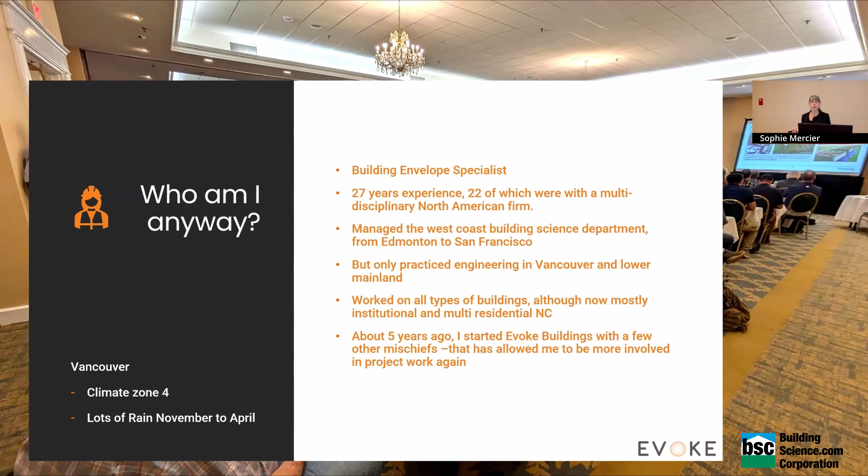So I mentioned Mark, one of my mentors. Another guy that was in the office for the 22 years that I was there was Pierre Gallant. He was more on the office side. He knew what he was doing, of course, but he was kind of like the guy with all the sayings. There's a lot of stuff that he said that have stuck with me, and there's a bit of mix between those two here.

Some of them, of course, don't have all to do with building science. The first one is: hire for attitude, you can teach the rest. I'm the living proof that Pierre was living by this saying, because he hired me - I didn't know squat, and I had a lot of attitude.

The second is: you can make a mistake, but don't make it again. Who doesn't learn from their mistake? That's what you remember - you get burned, and you will go to great extent not to have it repeat itself. I would add to that: you can make a mistake, but don't make it again, and if you make that mistake, make it small. Don't do it on a super large building where there's thousands of the same detail, right? So test on small stuff.

But coming back to the cavity, it's not something that is new, right? It's been written into articles a long time ago. Long time ago, 1963, this publication, and there were others around the same period that talked about that.

This is an extract. They're not very long either, right? They're like 8 pages, very easily read, and you can digest them very easily. That's just what I thought was a good summary of it: as with capillary suction and gravity, water entry resulting from an air pressure differential can be controlled by the introduction of an airspace in the joint or wall, right? What a simple approach to designing one.

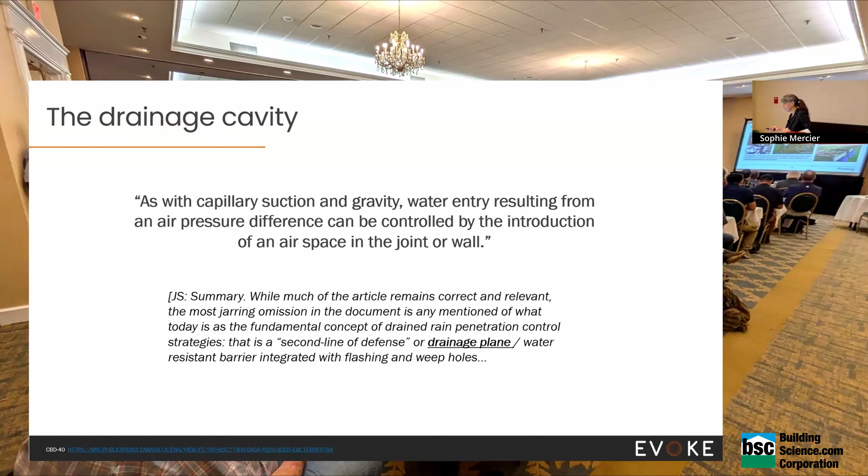So after the publication of the CBD, we had the adoption of the cavity in Canada. Some people did read it, but eventually people forgot. In the 80s and the beginning of the 90s, it disappeared almost completely in Vancouver.

As a young engineer fixing leaky condos with face seal cladding, I was quite impressed one day when I had to do an investigation of a building that was built in the early 70s. It was not because it was leaking, it was because it had those little square tiles. It was a high-rise, and the tiles were falling off, and we wanted to know how it was built so that we could design something to replace them instead of just trying to glue them back.

And we opened the wall, and there's a cavity behind it, in 1970. That's when I learned about the CBD, because I came back to the office and I was like, oh my God, look at this, they had it. Mark said, yeah, read that. So yeah, there were cavities in facades before that, but then people forgot. And that brought on a big mess.

The leaky condo crisis, I mentioned it a couple of times. It culminated into a commission of inquiry that looked into the quality of construction in BC that got published in '98. At the same time, the codes were changing to try to adapt, and the building envelope professional became a thing.

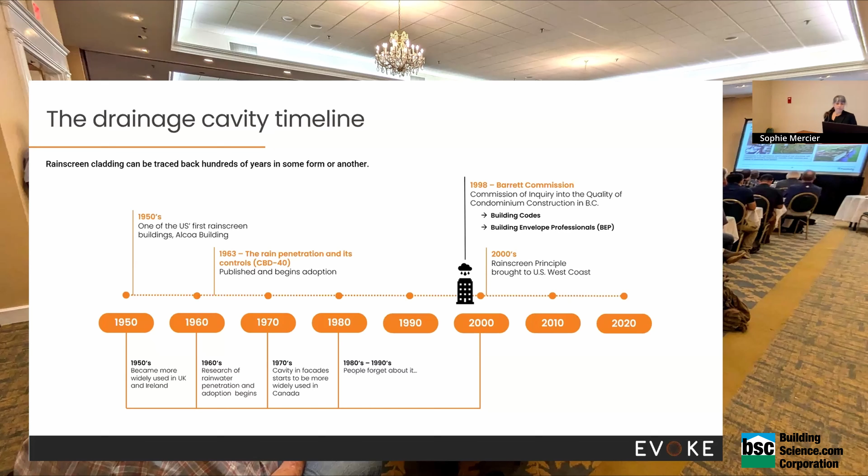So how big was the problem that we faced? Again, I don't have a lot of data from that time, but Dave Ricketts did a really nice presentation at BCBEC, and I stole the numbers from him. In BC alone, $4 billion worth of repair because of leaks. And that affected more than 30,000 units. That's a lot.

Some of the things that came out of that—I mean, how long did it take to repair all that? I think that there are some buildings that are still not repaired today. Some people have been putting their head in the sand for years, and some are being fixed by court order. Like when the owners cannot agree to repair their building and get a vote that can pass a resolution to do it, the courts eventually step in because buildings are shored up and the structural components are getting to nothing.

That reminds me of another story. You go to a site to repair some of those things. Have you guys heard of structural stucco? Like structural paint, about the same, I would say. But the first time I was looking at things, they're starting to take the stuff off on the ground floor, and I'm on the second floor, and I go to look at something on the balcony. The guy's like, you should step back.

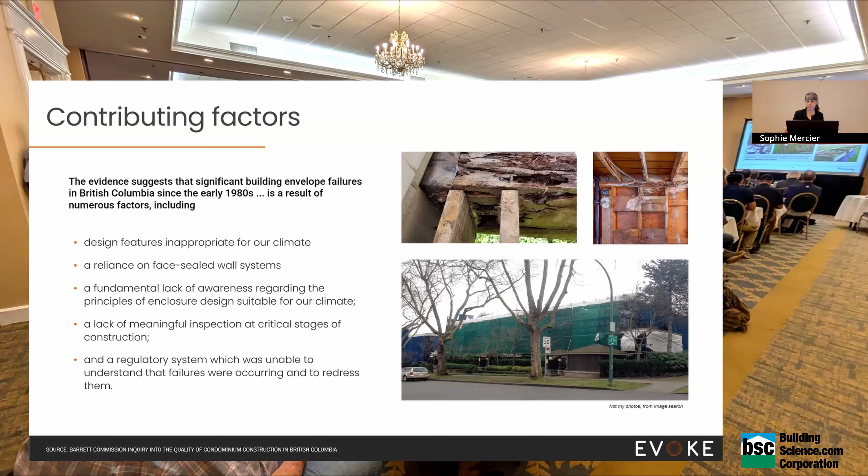So that was kind of my first point. I'm not just going to talk about the drainage cavity, but I want to round that up with - is history repeating itself? Because what I'm experiencing at my end in Vancouver right now is that, up till now, perhaps we're going to have some breathing room finally, but not for a good reason - there's been a boom in construction. Everybody's like, we need to build more, we need to build more. We don't have all the trades equipped with building things the way we want them to be built.

In fact, I've been going to site for over 25 years, and I'm always so surprised that a trade doesn't understand how to do a subsill flashing, or how to deal with a saddle properly. And I think that more than ever - I don't know if it's movement of people between companies, especially on the trade side, but also within our industry - mentorship is not the same as it used to be. I had the privilege of working with one great person for 22 years. Not a lot of people have that opportunity anymore when they move and move and move. You don't create that kind of condition.

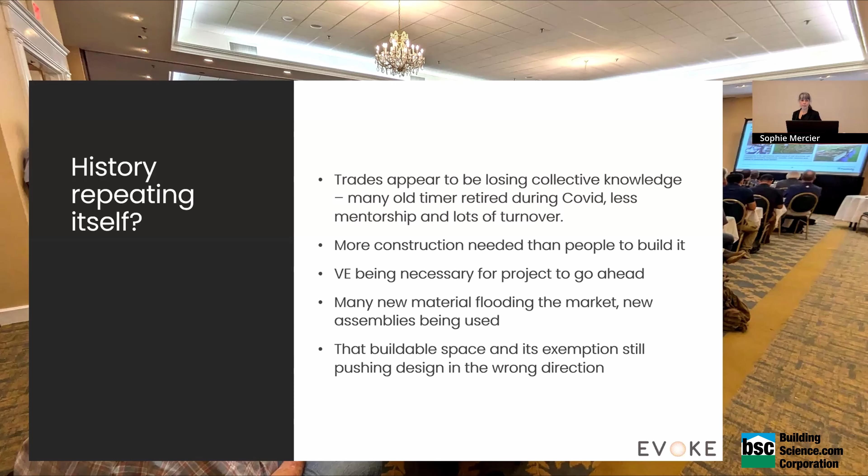The second one I wanted to talk about is better insulation. This one, not so much because of a failure, but more in terms of its evolution and how we can build on what we've done before. Just an example of it.

For a long time, buildings were built out of stone, with no insulation whatsoever. Eventually, the frame building came into play, and there was that nice cavity. So by convenience, I guess, and for more comfort, people started putting things in it, like newspaper and whatever you had on hand. Eventually, the insulation, because of the oil crisis in particular, picked up in terms of developing better materials suitable for what we need them for, more resistant to moisture, with a better R value, of course.

But again, I think that we're working on materials all the time, but there was a bit more stagnation that happened in the 80s and 90s. There's something repeating here. 80s and 90s, what were people doing there? The energy cost nothing in the 90s, right? So there was no huge incentive to work on it, I guess.

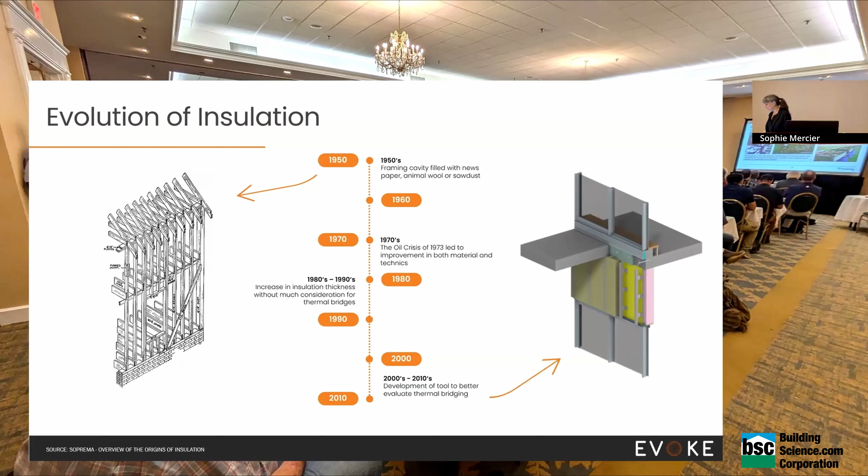So up until more recently, we're starting to take care of insulation, not just by itself, but in the context of an assembly, where we look at its efficiency within the context of the building. I'm working with one of our partners, Patrick Roppel, and he's kind of the guy behind this. The story I'm going to tell demonstrates that you can build on what you've done and get to good places.

We were all at MH, at Morrison Hershfield, and we were working on the Olympic Village. There were quite a few projects being built around the village because of the Olympics, so they were all serving to house the athletes. Part of the goals of that development was to be LEED Platinum. By trying to stretch the goal a little further, for a number of projects, and having a lot of the firms that wanted to do the right thing at the table, there was a lot of discussion as to how we were going to achieve that in terms of making the building thermally adequate to meet those targets.

At the time, there were very few exterior insulated buildings in Vancouver. At that point, I think we were a city of window wall, 70% window, floor to ceiling with spandrel. So there was not a lot of data out there to help with the program. What was happening is that we realized very quickly we needed to put insulation outside. We needed to have framed wall with lots of insulation. We could not do those things in window wall. But calculating what was happening, especially with the outside, there was not a lot of data out there.

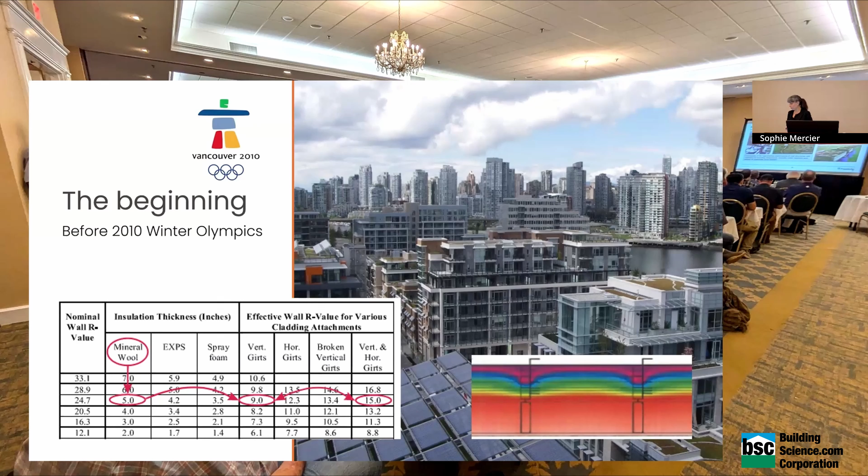On the footsteps of that, the team at MH wrote a paper, and it helped consolidate. When you write a paper, you think about things a little bit more, right? With perspective somewhat. And it came to a point where there was work there that we needed to push forward. And the first project was done trying to develop a bit more around the methodology on how to do the 3D calculation.

When you talk about non-combustible buildings, it's all very conductive material. So it's a little bit harder to imagine how the heat flows are going, and a little bit harder to evaluate properly if you have things that happen in 3D, more metal here than there, intermittent clips, for example. So ASHRAE 1365 was the first project that looked at validating the procedure to get there.

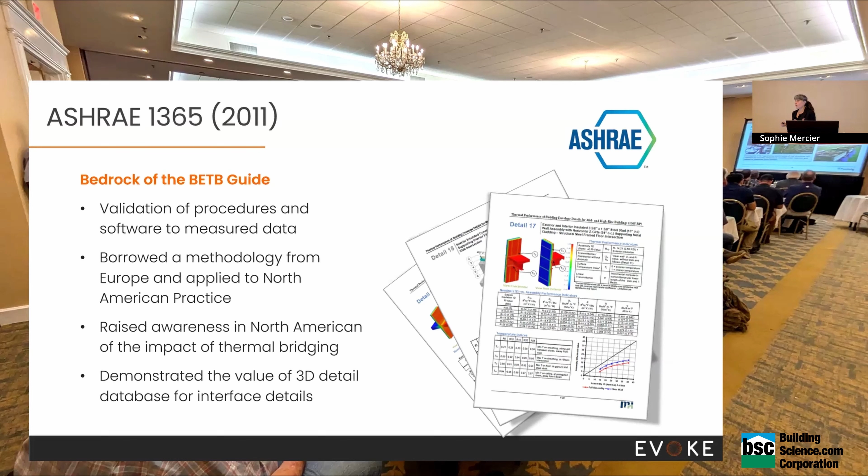And of course, we didn't invent it, we borrowed it. We looked at Europe and what methodology they were using there. And in the process of that, our goal was to help raise the awareness of the impact of thermal bridging, right? Starting to understand better what those impacts were. It was, I think, quite successful, and out of it, there was a lot of discussion to try to produce something more appropriate for practitioners to use, to take on that methodology and apply it across the board.

And that required a lot of funding. Gathering funding is a lot of going to people and convincing them it's the right thing to do and all that kind of stuff. So it took some time. In between, what Patrick ended up doing, while helping search for funding to do the next step, was to produce those solutions where he broke down some of the most asked questions.

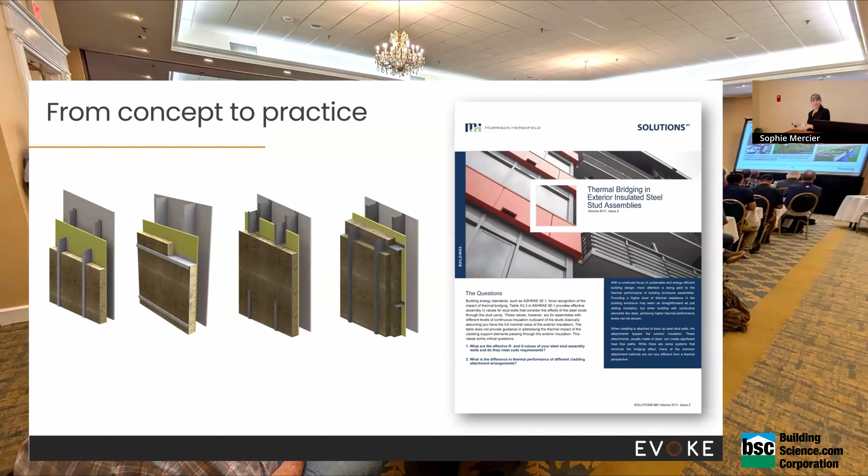The clip one was one of them: what's the difference between Z-girts on the outside that go through the insulation? What if you do them crossed instead? What happens if you put them intermittent, right? So that was the first one. The other one, I didn't have a copy of it, unfortunately, was the spandrel section in curtain wall. What is it worth, truly, in 3D, and how does it scale with the size and so on. So those were two that were quite successful and helped launch into the thermal bridging guide.

So that was the tool that we needed to help everybody get on board with that new methodology for the area. First, it established exactly how you should be looking at thermal performance of an envelope, looking at the fact that you can take, like they do in Passive House, the area of the components you're trying to evaluate, like the wall, for example.

You take the clear field value, you multiply by the area, you add the linear transmittances multiplied by their length, and the point transmittances multiplied by their number. And you divide everything by the area. It's a very simple calculation if you have all those numbers. So the thermal bridging guide was a first pass, anyway, at getting numbers out there.

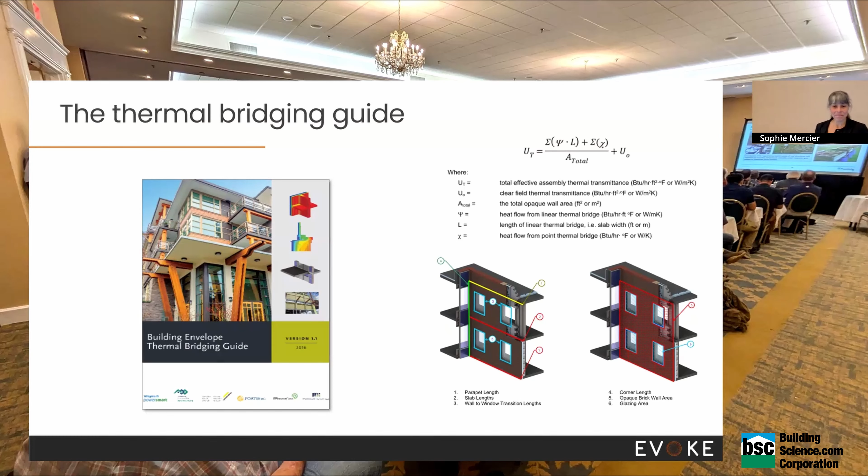So not only did it describe how you needed to do the methodology, but it modeled a number of details and assemblies, and put that as an appendix to the technical part of the guide and put it out there. The first edition, 600 pages. Most of them, details. So you see why the funding was important. I guess I explained that a little bit, but what I wanted to say about this is that as we went on and did those things, it became part of code.

The guide was so well received that it actually influenced code in the region. And we're lucky in a way because the way the code works in Canada, you have the National Building Code, and then the provinces can either adopt it or modify it slightly. In BC, they modify it slightly. But more than that, the city of Vancouver has its own code.

So I think what was very helpful in this process is that there was a large group of people in Vancouver that wanted to do the right thing, including at the city. And at a small scale, it was easier to affect changes. And when the province saw that it was working very well, they looked at the ramification for other zones, but they extended it and adopted it at the provincial level, instead of waiting three code cycles at the national level to trickle back down. So that was one good thing that came out of how it was structured. There's a whole slew of bad things when everybody can do their own thing, but that one was a good thing.

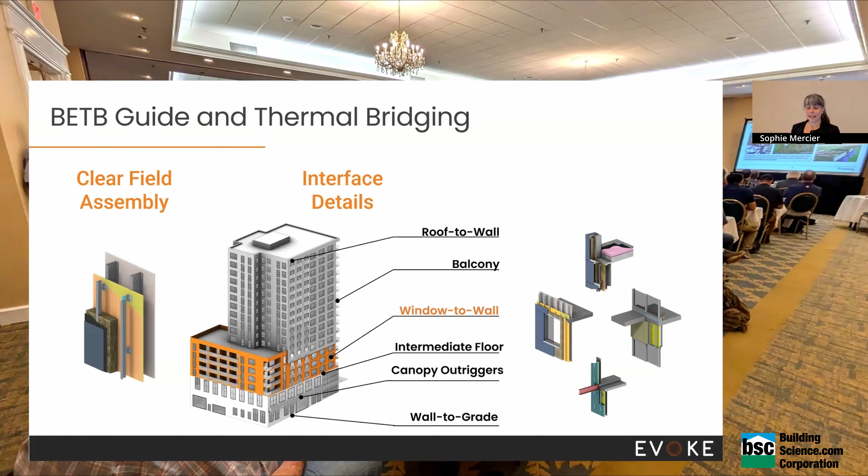Anyhow, so we do those projects now and we use that all the time. The thermal bridging guide is the basis of how we do calculations to give input to energy modelers that will provide what the building performance is. And what's become evident in doing many of those is that the details contribute 30 to 70%. A good building will have about 30% heat loss through the details. And a building where you didn't pay attention whatsoever could have upwards of 70.

And why do we have 30? Again, that is non-combustible construction, so steel studs, a lot more conductive than wood. You cannot do without windows, so you'll always have some window perimeter, wall to roof transition, base of wall. You will have architectural features regardless of what you do. Another thing that became evident is that the window perimeter was often the largest contributor to the heat loss. So from my experience, if I give you two things on a non-combustible building: pay attention to your windows and pay attention to the details. It's not just about the wall selection you make.

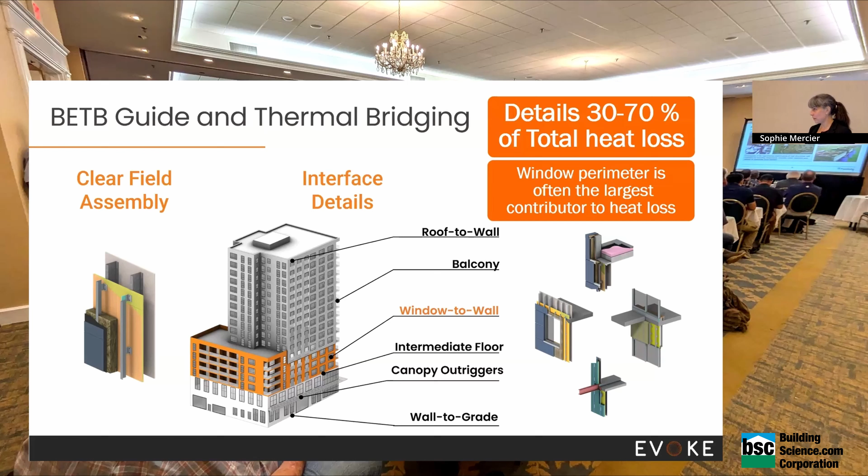So I said it was 600 pages, right? That was in 2015. Then it was successful, and people were like, but what about this detail? What about that detail? So there was more funding. We did more details. Version 2, 3, 4, I don't know how many pages it is now. In fact, it's a bit obsolete, because with so many pages, how do you find what you need? So the next project that was funded was to develop an online tool that stored all that, on thermalenvelope.ca. The database of all the details done to date with the methodology established for the thermal bridging guides is on that website.

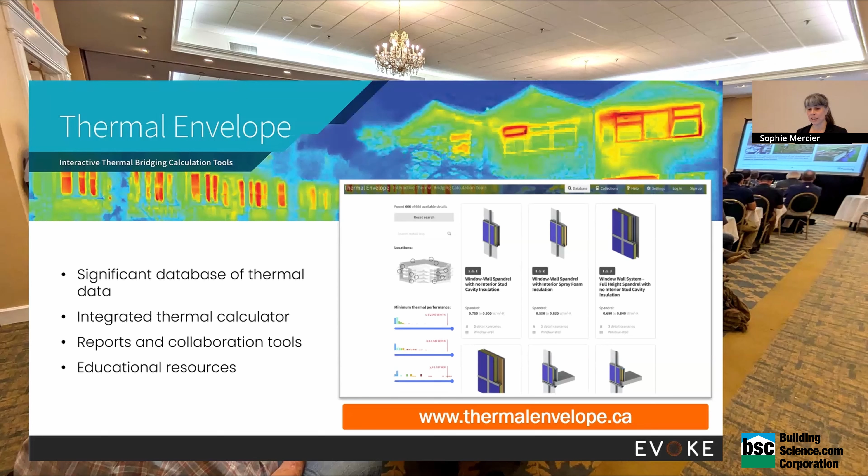And they can be searched by type. Also, if you're targeting a certain performance, you can target that performance and it would give you details that could achieve that. So great resource. And there's other tools on there and training as well. So I invite you to go and have a look.

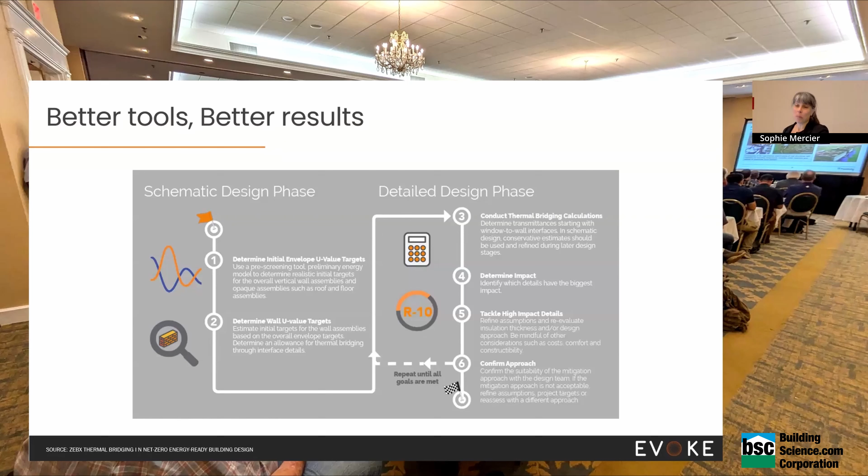To somewhat wrap up that story, I think one of the lessons is that with better tools, better results. With better results, better tools. It's a circle that goes to make things better, building on what you've done before, getting to a good place, but we're not done yet. There's tons more to do. The funny story is that when Patrick started and did the first research project and the thermal bridging guide was finally issued, he said, whew, I don't plan on making that my career. He's still doing it today. So it's important work, and there's still a lot to be done.

Another thing I wanted to talk about is charting the path ahead. As part of the changes in how we were doing things with energy and buildings, the city of Vancouver, but also the province, had their goals to 2030 and beyond. They looked at what they needed to do better on the carbon side, and they established that goal. At the time in Vancouver, from a builder's perspective, there was a lot of pushback on change. I think it's normal human behavior to be a little bit resistant to too much change.

And one of the ways that they tried to mitigate the pushback was to actually chart what the change would be up to 2032. So they said, listen, this is where we want to go. This is the study we've done. We won't ask you to do this from the get-go, because we might set ourselves up for failure to have an entire industry go and do the top building. So let's chart the path.

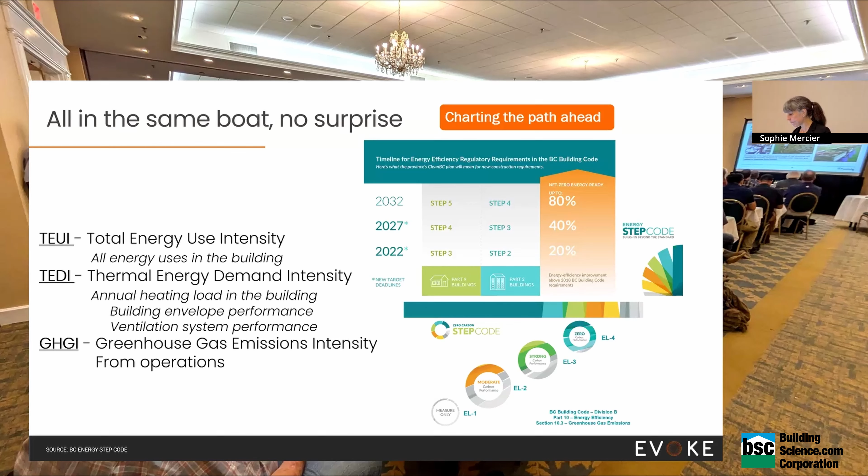but realizing that, and I should be clear, that is operational carbon, right? There's a relationship between the thermal performance of your building and the carbon you're using; both are important, and if you can balance those 2 things, maybe you're in a better place. Okay, so that leaves the question: is net zero really an achievable target for an entire industry?

I don't know. And I mean, it is a lot of buildings, right? But what I have to offer is this: net zero is a lofty goal, yes, but it's a necessary goal. Because I think that we always aim for something, and if we could get to at least a good part of it, we would be in a good place. So I think that it's an important one.

I hope that we will be able to achieve it. Perhaps not by 2032, is what I'm kind of seeing in the progress of where we're at, but at least at some point in time, soon enough. My third one, whole building airtightness.

So the history of air barriers goes back to the 70s, right? And it was probably brought on by the oil crisis again. Building professionals were looking for ways to make buildings more energy efficient. And they quickly realized that if they were able to control the air leakage, it made a significant difference. So air barriers in Canada became code in '86 and started being installed more regularly and so on.

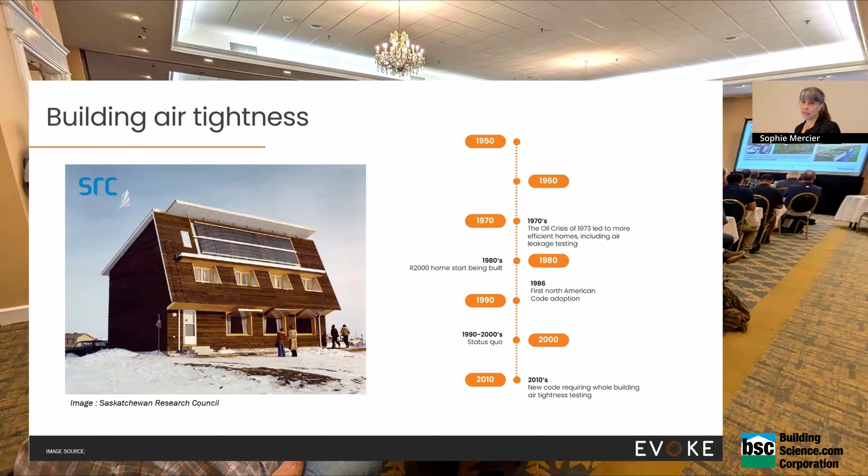And up to today, where now in Vancouver, we are actually, as part of STEP code, required to test the building at the end and report and meet a certain target. I'm gonna read a little bit here, but Canada was certainly at the forefront of the air barrier movement.

And when I was trying to find some information on that, I came across an article in the Canadian Contractor magazine, and it was an interview with Harold Orr. He was one of the lead engineers on the committee that pioneered the Saskatchewan Conservation House. And he was asked to reflect on the different stages of the development of energy efficient housing in Canada. And that's what he came up with.

Stage one was to find a way to measure where the leakage of energy happens in a house. And what was written in the article, and that was news to me, so I'll share it with you, is that at the time, there was no efficient way of testing a house for air leakage.

So the first thing that he came up with was to use tracer gases. And the equipment and everything was quite expensive, and there was no way that could be repeated on multiple houses, at scale anyway. So he then came up with a methodology that was pretty much a plywood with a fan in it and some equipment to measure what was going through. So that was in the 70s.

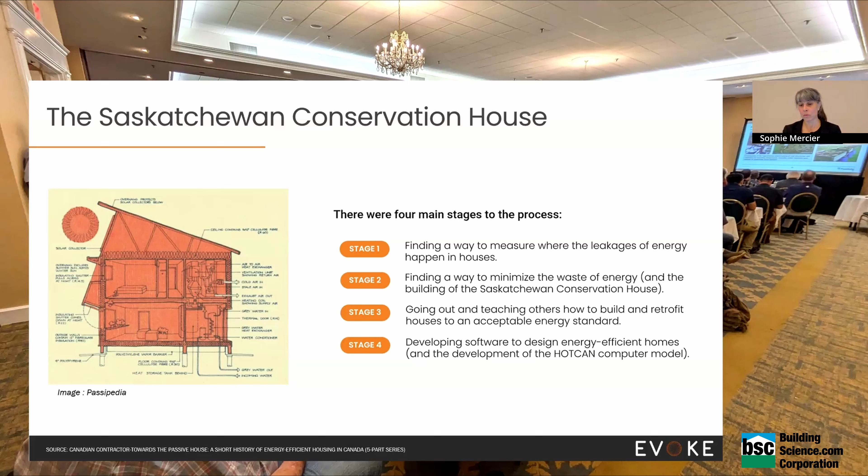What I wanted to take from those four stages is a couple of things: going out and teaching, making sure that what you were establishing was an acceptable level, and of course, having the tools to verify all this, the equipment to test and the software to evaluate where you were going to be. So how important is airtightness?

It's amazing that so many phones are not on silent.

How important is it? It can be quite important. I think that in his article, he pointed to a 50% improvement when he introduced the concept of a well-designed and well-installed air barrier. Those numbers, which I took from a much more recent publication, demonstrate that a little bit. You can see that if your baseline was at 0.4 CFM per square foot at 75 Pascal, without an air barrier, at the edge of the scale, there's like a 60% difference in the heating demand. That's kind of what we're now expecting of buildings, more or less, 0.4 CFM.

Now, does that mean we need to stop there? No, there's lots of opportunity still. But what I wanted to demonstrate here is really the scale at which the air barrier can make a difference.

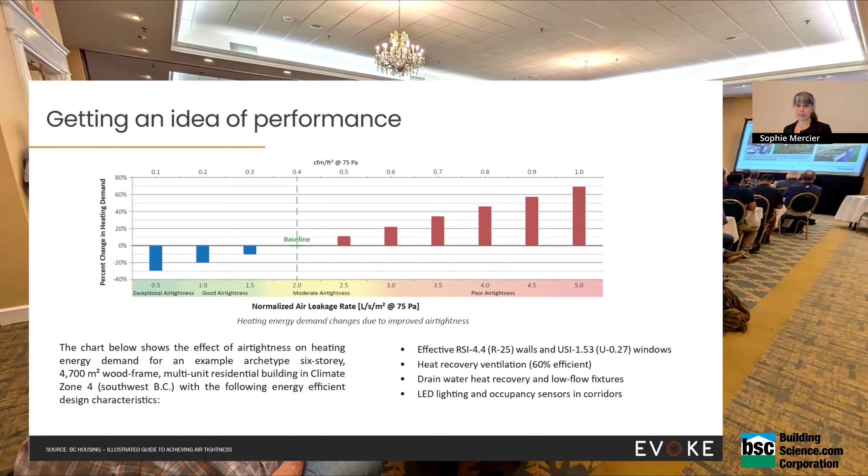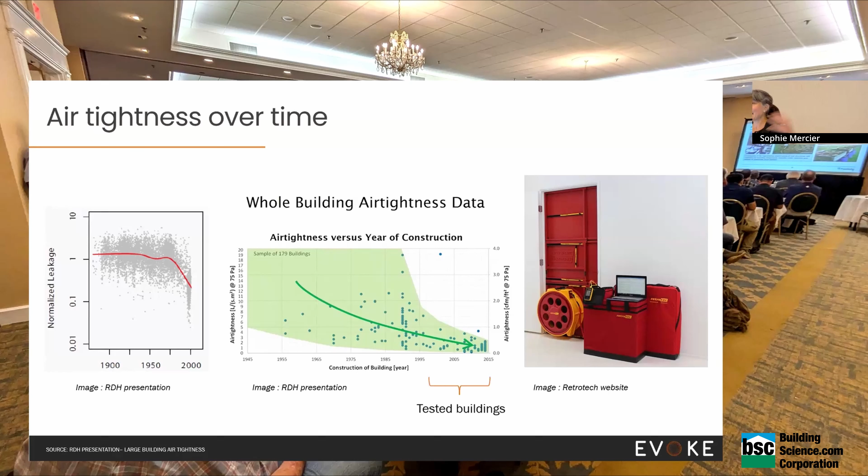That's because those data points mostly were buildings that needed to meet a certain standard and knew they would be tested. Whereas the data points of the graph before that have more to do with buildings that were voluntarily meeting a certain standard, or were tested because they were looked at in the context of a retrofit and data was accumulated. So you can see already that difference.

So that brings another question. If you're not testing, are you really getting what you're expecting? I think we've established with the leaky condo that having something in the code that tells you you need to do something is very important. We can also put energy and energy standards in there, and right now we have testing for air leakage, but I'm wondering, is the next thing that needs to be really tested through measurement and verification the actual performance of the building?

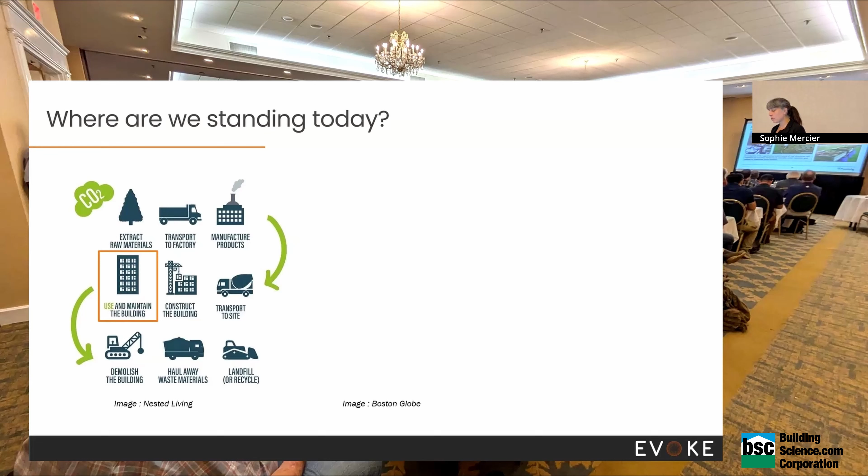But what I wanted to counterbalance with that is that the two things I think are very at play today is not only that we want to do something better for the environment, but that there's an economic crisis in terms of affordability for people. I don't know, do we want to build a world in which nobody can afford to live? Or do we want to try to achieve both? We need to keep that in mind.

So again, building envelope, not mechanical, so I'm not going to talk about that. Not embodied carbon so much as in the context of the balance of things. But again, non-combustible construction, so steel stud, where thermal bridging really matters.

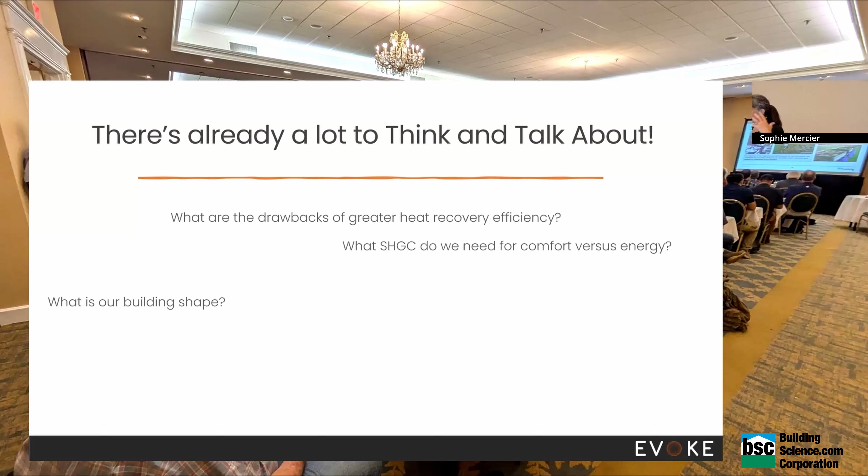So you have all this coming at you, all the changes of code and all that kind of stuff, and you want to do the right thing for the environment, and all of a sudden all the questions are coming. You're sitting in a meeting and people are asking, what is it that I need to do for this? How do I meet that? And if I do that, is that better than this? And it depends, right?

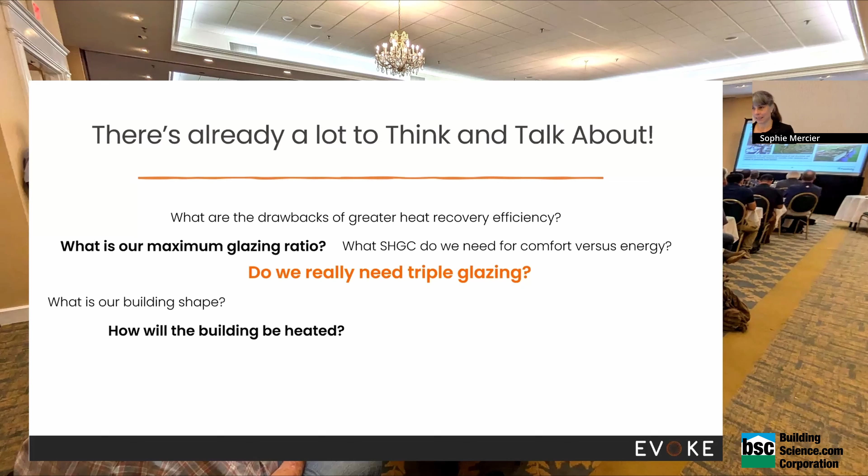At the end of the day, everybody's asking, can you just tell me what I need to do? That's what I get in most of the meetings after we discuss too much, because they don't have the background to make necessarily the decisions. When we talk about developers, the guys with the money, the people with the money developing those projects.

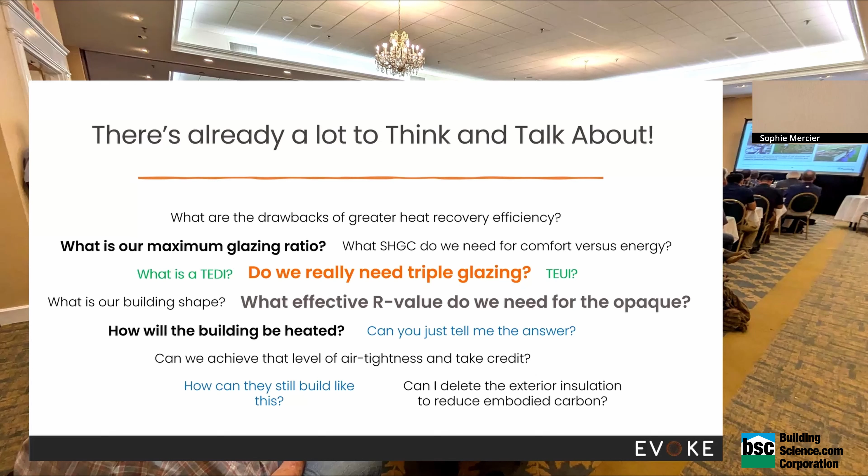So, how do we go about doing that? Even myself, I'm listening to all the presentations here this week, and there's a lot of information. Sometimes it makes my head spin, because between being paralyzed by what I'm hearing and not knowing what to do, and wanting to do the right things, where do you start?

So I thought I would try to bring it back to what I do and give you a few things that could be a good reminder for some and a good takeaway for others.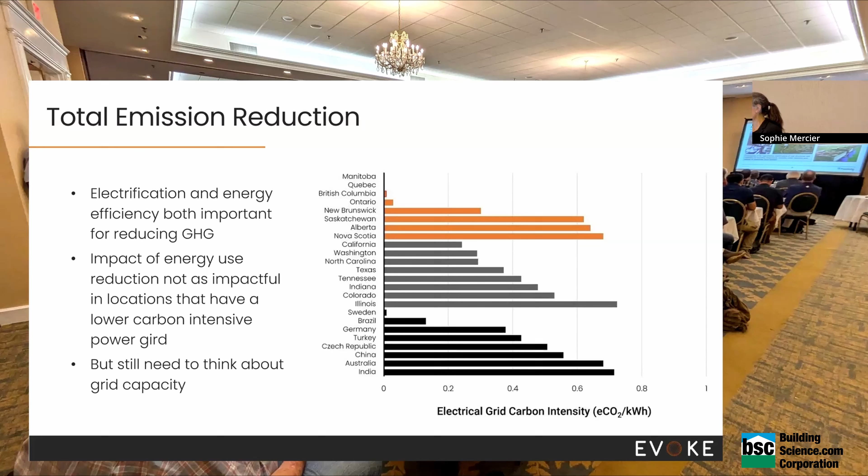I don't need to go over that, except perhaps in the context that I'm from British Columbia. You can see on this graph that the intensity of our grid is pretty low. So I'll tell you, when I'm in meetings with people who have tunnel vision about embodied carbon, I get so much pressure about taking out the insulation because it supposedly doesn't matter for emissions, you wouldn't believe it.

So just putting that in context of what I'm going to tell you next. My rule number one is the best savings is what you don't use in the first place, right?

So with an energy performance goal in mind, either dictated by code or by a sustainability goal, starting to think about beneficial decisions that would make a reduction in the amount of material you need to get to a certain thermal performance. What you have to understand is that I work in a context where, I'd say, 90% of the buildings I do are code buildings. They're not maybe 2% better than code, not 50% better than code. So the environment in which I work is trying to make the most of my sandbox, right?

So what about the perfect wall? As for the wall, think about Vancouver. We're building to the property line, we're having issues with wall thickness. So should we start really considering heavily using hybrid walls on every project?

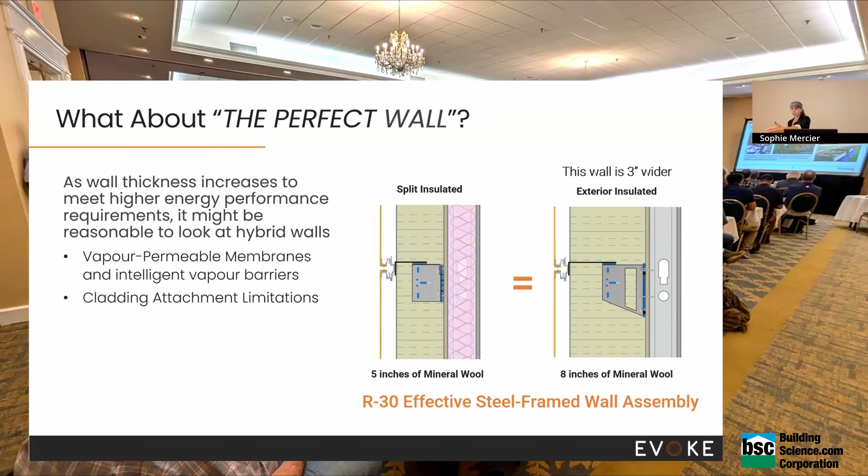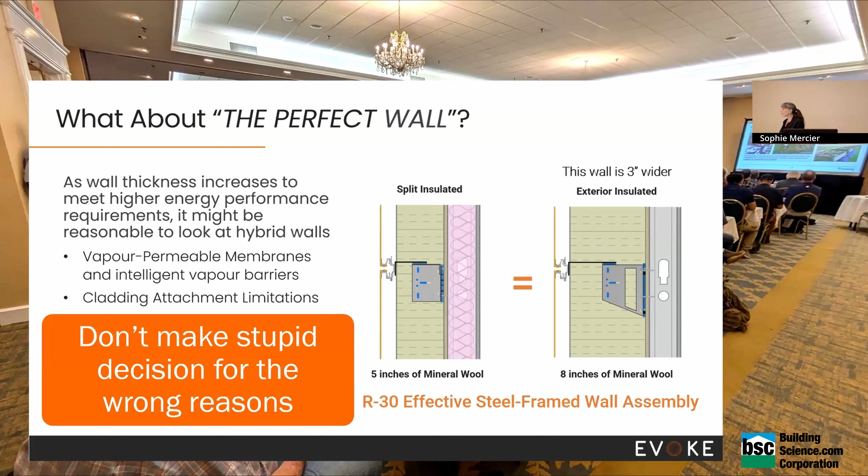Well, we have vapor permeable membrane, we have intelligent vapor barrier, and there's limitation also to cladding attachment. There's so much you can put on the outside with the wind loads and everything. So don't make stupid decisions for the wrong reason. I'm going to try to demonstrate how I approach this, trying to avoid building walls that are not suited for where they're used.

Of course, when you're talking about affecting the TEDI, the thermal energy demand intensity, you can look at affecting the air tightness. We looked at the graph, you can make a difference with that, so I've talked about that, I won't come back on it. And heat recovery, same thing, the heat recovery makes a big difference in the TEDI, the efficiency of it. So you can make a difference just by changing the efficiency of your equipment. That's pretty straightforward, so I won't touch on that more than this.

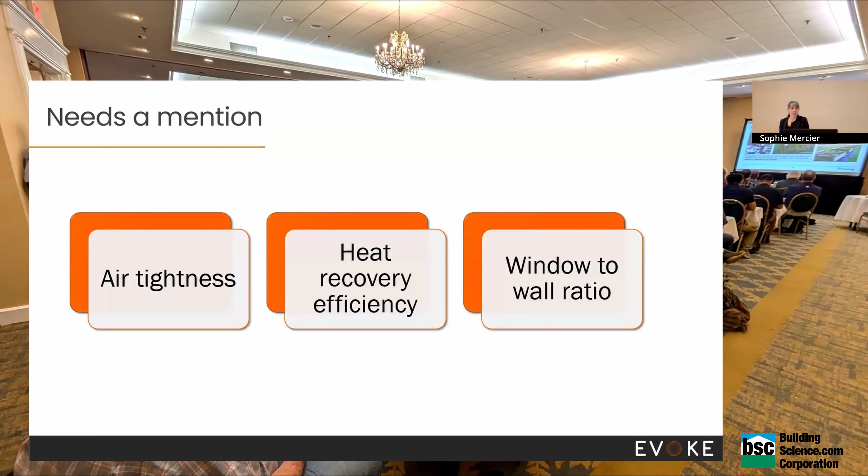And the window-to-wall ratio is also something that you need to think about. That's what you mentioned earlier, right? Form matters.

In what we do, the form matters so much that it dwarfs everything else.

What I wanted to show with that data is that if you take a building, of course in high rises, we're losing heat through the wall mostly, right? The roof is a tiny part. The walls of a tall building are a big surface area of heat loss. So this is presented by vertical surface area compared to floor area. When you have a VFAR, we call it, of about 0.5, like for a square at 600 meters, you get about a TEDI, forget the unit, I just want to talk about proportion, of 30, in kilowatt hour per meter square. If on the opposite end of the spectrum you were to do a single loaded corridor, U-shaped building because the courtyard is quite nice, then you'd be closer to 60. That's 30 TEDI difference, that's like a 50% difference just from the form.

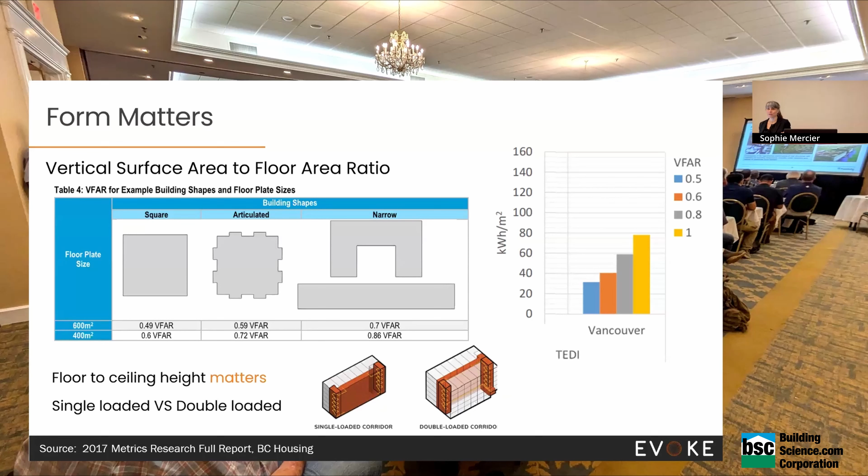Another tool that's pretty cool is Building Pathfinder. What I wanted to do is go one step further than telling you it's important. I want to show you how for the same other data, like window ratio, wall R value, roof, everything stays the same, this is the difference it makes between having a typical narrow or complex form. You can see the results. That's why it's a super cool tool, because it visualizes the results as you go.

On the other side, if you were to say, okay, I really want that courtyard, what kind of wall do I need to get there? What kind of difference do you think walls will make over the TEDI? So I chose the complex one, the middle one, not the narrow one-sided corridor. It was the one in the middle, so it was 45. And that's how much difference I'm playing between R15 and R30 overall, considering all the thermal bridging. That's how much difference I'm making with the wall. So if you want to know if form is important, and that doesn't convince you, I don't know what will.

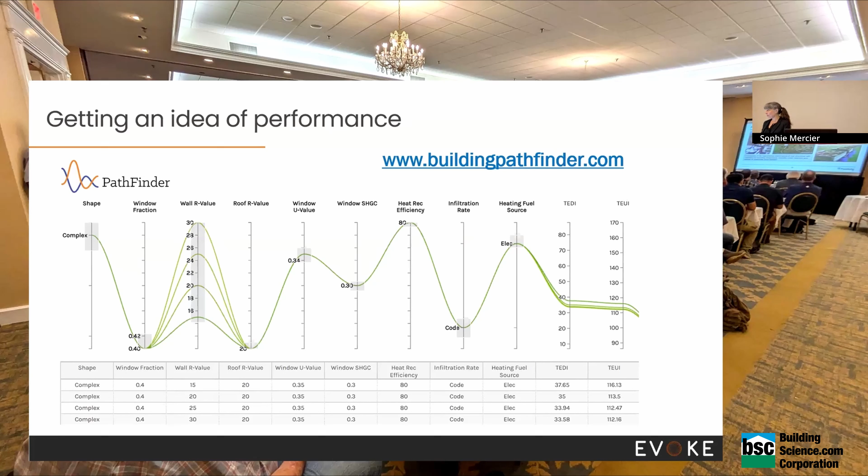So at the end of the day, not all buildings need to be iconic. Something simple can do the trick.

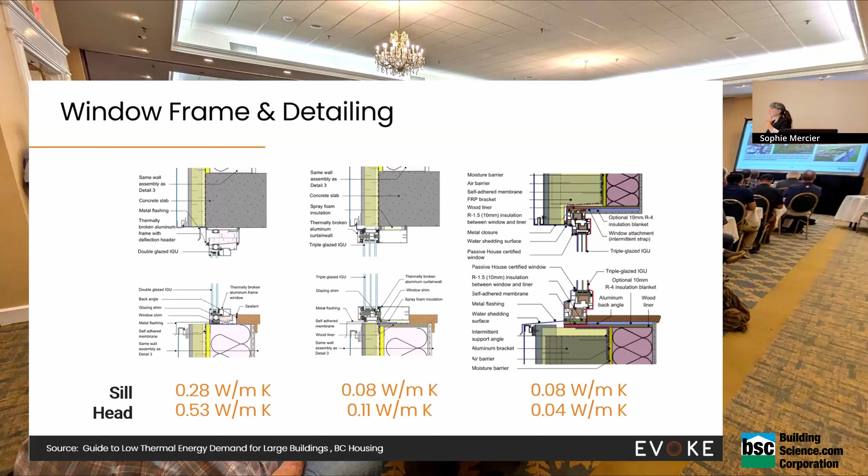On that note, I'll leave you with three things, and I'll go very fast. Because the linear transmittance is important and the length and the window, think about how you're installing your window. It makes a huge difference. That's also something you can do to reduce the amount of insulation you need to get to a spot.

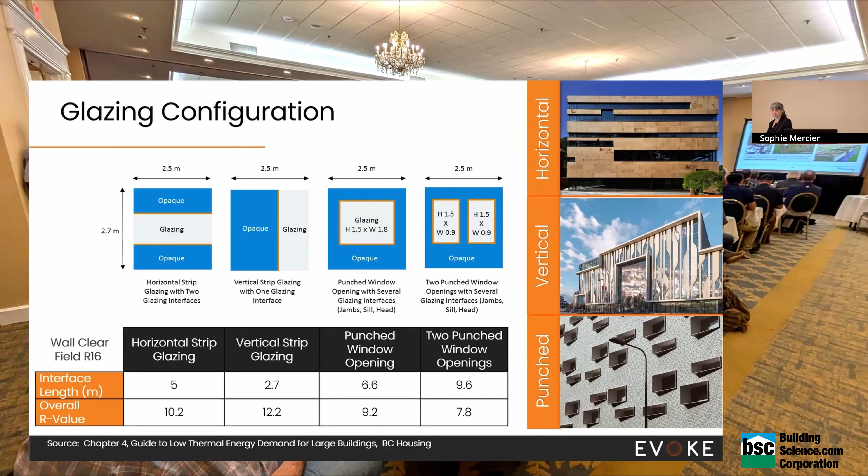The form of your window makes a difference. Like a 2-punch window versus a 1-punch window, same area, like 40% of your wall, it makes a difference. So think about that. The balcony form makes a difference, let alone that the inset balcony also changes your form. How you deal with its attachment makes a difference. The best thing is probably no balcony, but livability comes into play in high rises.

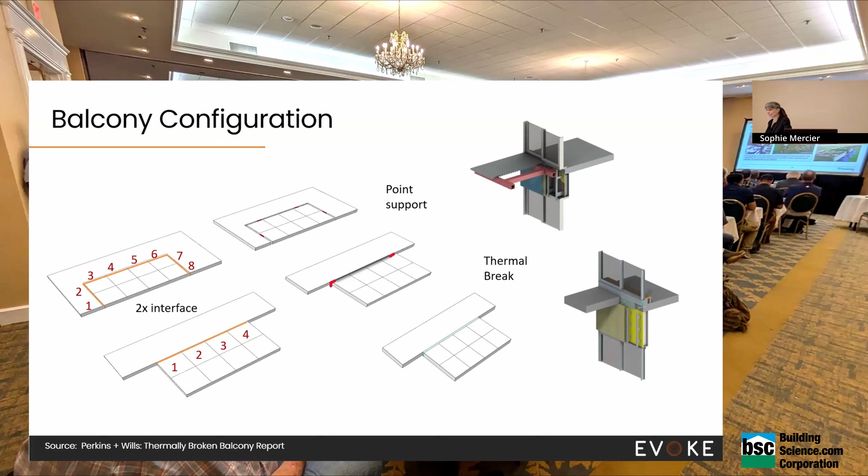I didn't go too much into carbon, but there's a study that was done in BC that is more enclosure-centric. If you want to dig into that, I invite you to do so.

Awesome, awesome, awesome. Got a lot of people that need to travel with shuttles and everything else. You get to ask the one and only question. Oh my goodness, such pressure.

So my question is about the leaky condo crisis. That was something I am not very familiar with. You had a lot of interesting potential factors that could have caused or amplified that. I didn't see on that list anything that was specifically or uniquely residential versus commercial. So my question is, why was it condos that had the crisis versus all other buildings that were being built at that same time?

The wood frame condos experienced the worst damage. There were condos that were high rises, steel stud, they came a little bit later. The deterioration mechanism for those, to the point where you need to do something, took more time. And institutionally, perhaps people engaged on those projects were also a little bit more knowledgeable. We've repaired schools that faced the same thing, but the failures were not as big at that level. So I think the wood frame and commodity kind of construction is what experienced the biggest impact.